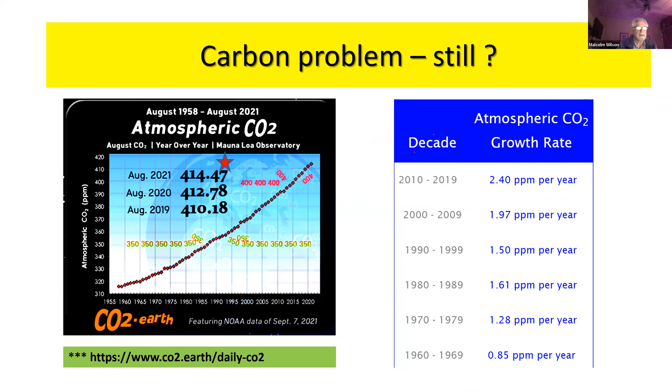So where are we? We've seen significant increases in the amount of carbon dioxide in the atmosphere. This shows us that not only is it increasing, but the rate of increase is speeding up as we move along.

And this is always a nice one to look at, the carbon dioxide concentration. If you could go back one.

So this is the daily, weekly, monthly average, etc., of CO2, and you can see the increases in those waves of carbon dioxide in the atmosphere as we move through the last couple of years. The peak is generally in May in Hawaii. A couple of points here: yesterday, the concentration was just over 420 parts per million. If we use the averaging curves, that was about 418 parts per million. This is CO2, not the other greenhouse gases.

NOAA has estimated that on a carbon dioxide equivalent basis, we're over 500 parts per million now.

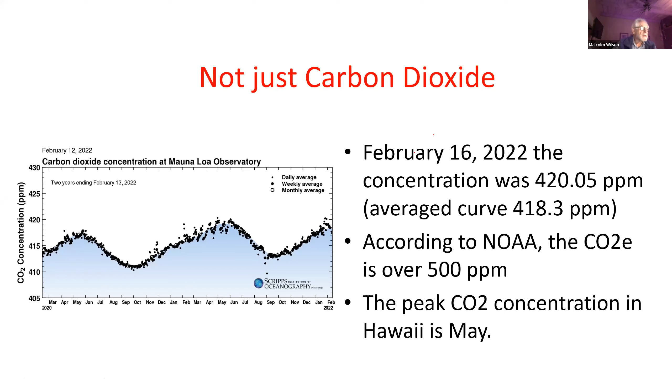So why do we need carbon capture? We, of course, have to protect the environment. As I said at the beginning, we're seeing changes to the environment, more extremes in terms of weather, some of the extreme events supercharged by the encroaching climate change. But we need to continue energy security. We cannot live anymore without it. We cannot manage the population of the globe without massive use of energy. So we have these two problem areas to deal with.

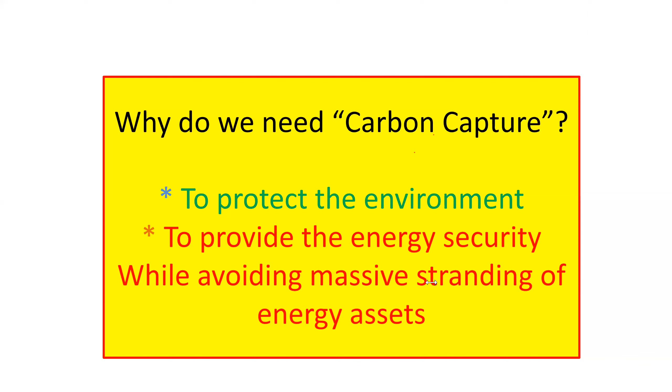Not only that, it's going to be very difficult to afford a rapid change to renewable energy, etc. Probably not even possible - hydrogen economy, electrical economy, whatever - without massive stranding of energy assets. So to some extent, we have to gradually phase those out over the coming decades.

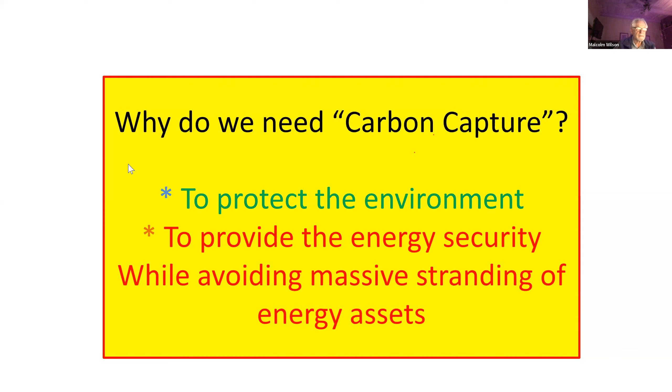So this is just a quick look at the embedded carbon emissions in various forms of electrical generation. Nothing is without CO2 emission - some of them, of course, are very low: hydroelectricity, wind onshore, wind offshore, etc. Down at the bottom of this chart, we see natural gas and coal without any scrubbing. And at the very bottom, we see what can happen with CCUS - with a 90% capture of the CO2 from those electrical sources, we can bring those down to something approaching renewable energy emissions of CO2.

So in terms of what this can do for us, we see how important CCUS, or CCS, is to the future of energy.

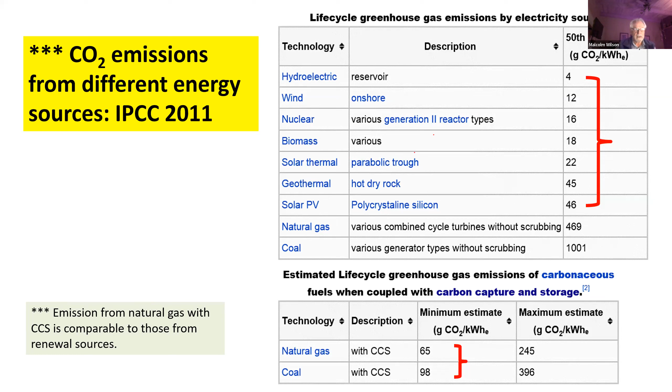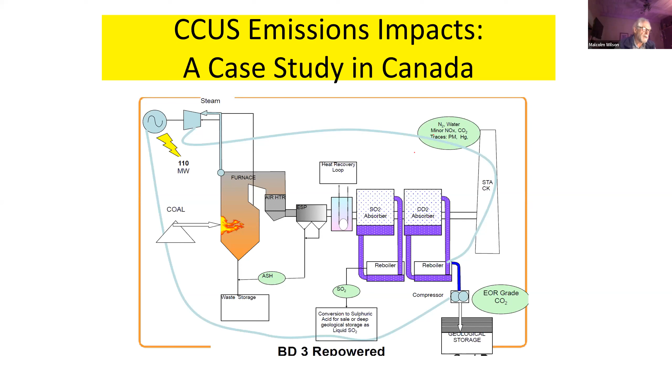And of course, we're proud to look at and see what's happened in Canada. Bill mentioned the Weyburn project, but along with that, we have the first of the coal-fired power stations that has done a conversion and is capturing CO2 with a goal of 90% CO2 capture, and utilizing that CO2 either in enhanced oil recovery or in storage in the Aquastore project in Saskatchewan. This will come back to - just one of the projects that's underway in Canada.

So the emissions impacts, as we look through, these are not just greenhouse gas impacts - there are other impacts as well, which are also important. Here we can see what happens when we put 90% capture on a coal-fired power plant. Of course, one of the negative impacts is the amount of parasitic load, reducing the net output of electricity to the grid, but this can be managed. It does have a number of benefits: the 90% reduction in CO2 emissions, effectively taking sulfur emissions down to zero.

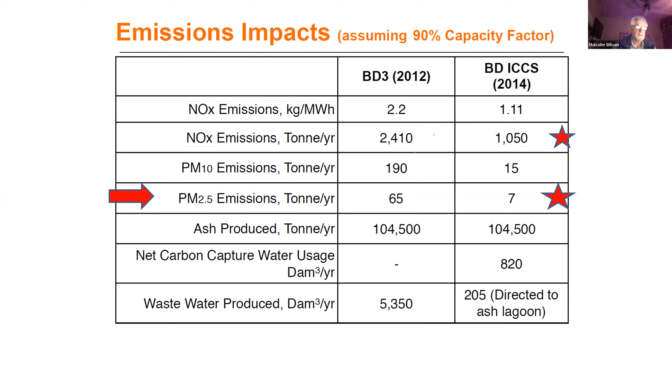And also significantly reducing NOx emissions and particulate emissions, both of which have health effects in the region. So we're also seeing a significant reduction in the amount of wastewater that's produced in this use of CO2 capture.

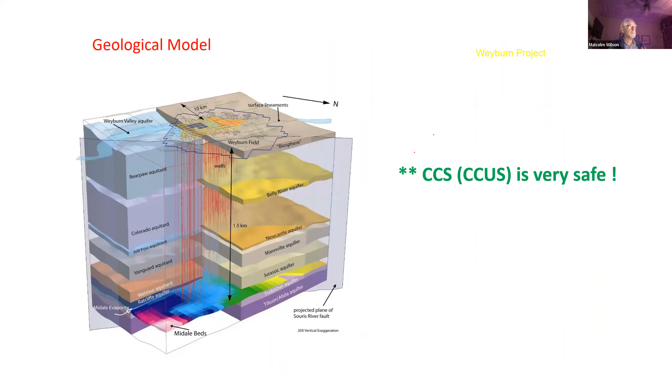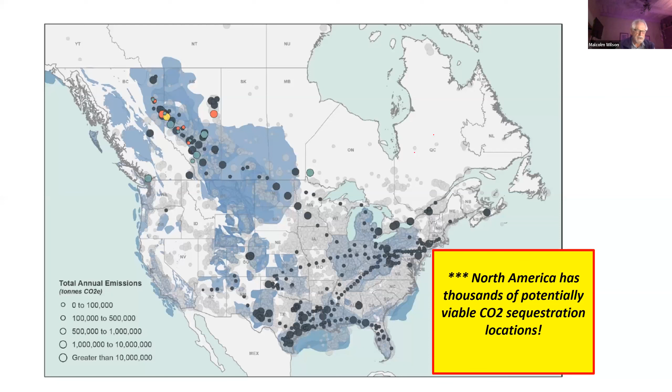We can see, looking here at the US and up into Canada, very significant areas where we have high quality locations in the subsurface for the safe storage of CO2.

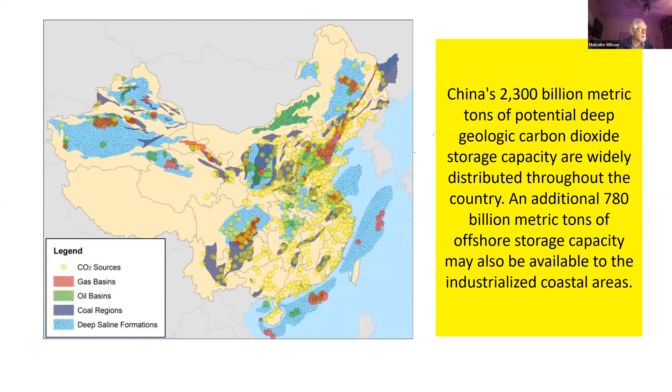We're not going to show everything, but you get a sense we're seeing similar distribution of saline aquifers where we can store CO2 in China as with the US, one of the biggest producers of CO2 in the world.

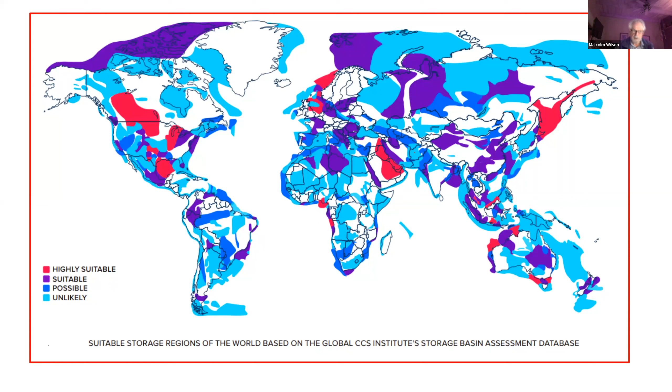Here's a global view of where those storage locations are and a sense of the quality of those storage locations. It's good to see we have a lot of potential in Canada and the US, but there's potential globally. Looking at the highly suitable areas, we anticipate that in a number of those possible locations we'll find equally good storage opportunities.

Energy security, of course, remains a critical issue, as I said.

One potential is storing CO2 through enhanced oil recovery, which offers the opportunity to learn a lot about putting CO2 into the subsurface, how safe it is, how it moves, and what the impacts are on the subsurface and the sediments and rocks. At the same time, we can recover considerable amounts of oil without having to look for or develop new fields in areas that may be more environmentally unfriendly.

One of those controversial areas globally is whether we drill on the North Slope, et cetera. So this offers us an opportunity to use what we've already got and produce more of the oil we're going to need for that transition, but in a way that reduces CO2 emissions.

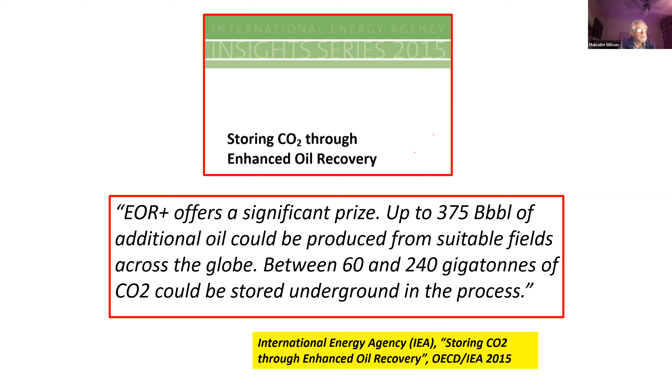As Bill mentioned, the IEA greenhouse gas Weyburn-Midale CO2 monitoring and storage project was one of those attempts, following on from Sleipner, to look at a major enhanced oil recovery project and understand what happens to the CO2, and the safety of the CO2 in that zone in the subsurface. All of the work we did, the risk assessments and so on, indicated that this is indeed a very safe way of storing CO2.

This is one of the papers we put out in the journal Petroleum that goes through the history of that project, how it came about, and something of what it's telling us.

This is a dated slide now, but just to give you an indication of the size, Weyburn itself has about 1.4 billion barrels of original oil in place. We're looking at an estimate of around 11 to 12 percent increase in the original oil in place produced back with the CO2.

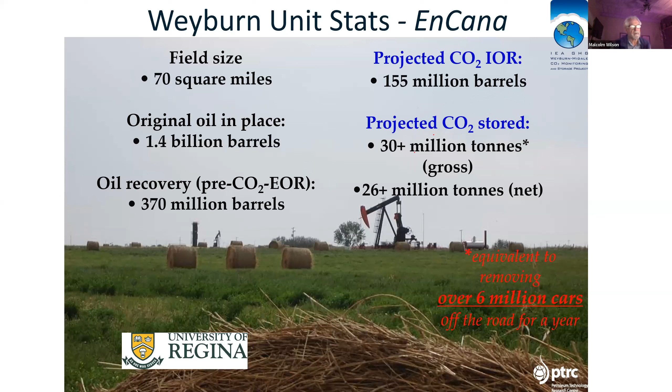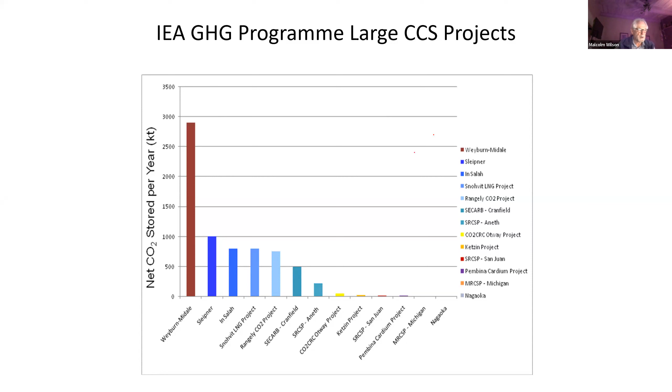This is again a little bit dated - there are a number of other projects out there now - but looking at the amount of CO2 stored on a net basis during the year: Weyburn is an EOR project, so CO2 is produced back, recaptured, and re-injected. Sleipner is a storage project with about 1 million tons a year of CO2 being injected and stored. In Salah is no longer in operation, but was a similar type of project for storage as opposed to enhanced oil recovery.

If we look at it on a life cycle basis, producing oil from somewhere like Weyburn with CO2, by the time that oil goes through a refinery and reaches your car, our estimates for Weyburn show that oil produces about 70% of the CO2 that would come from the tailpipe using oil from primary production. With oil sands, we have maybe 100% more.

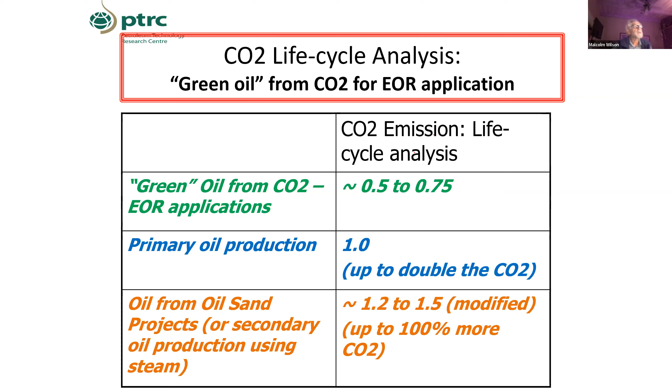So why Saskatchewan? Why Canada?

We have some extremely good areas for the storage of CO2, running right up through Alberta in the Western Canadian Sedimentary Basin and down into the US, particularly the east side of Montana, much of North Dakota, and a little into South Dakota. There's also a bit of an opportunity in the southwest corner of Manitoba, in the oil producing area of that province.

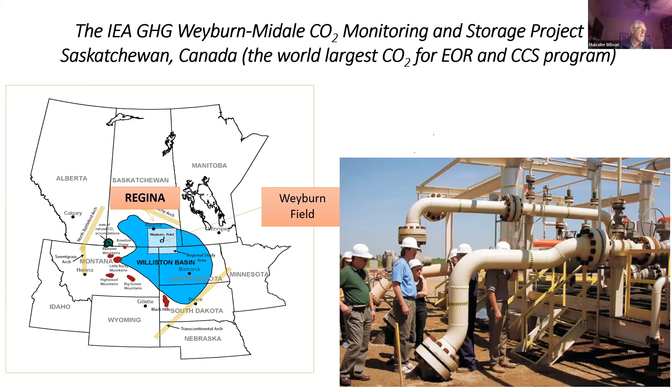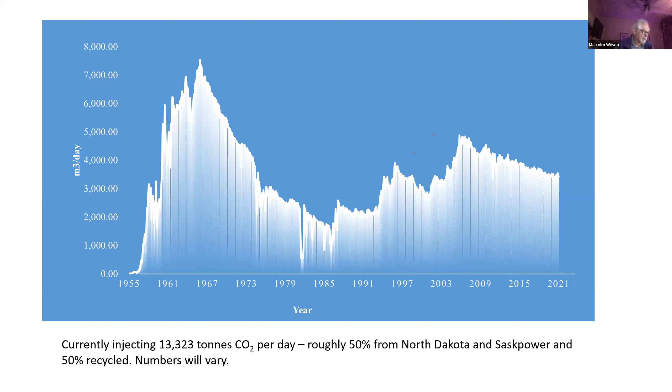This goes back quite a long way. We don't have the history of West Texas with the SACROC field, but Shell looked at CO2 injection in the late 1980s. As part of that, aside from drilling in the field and initiating a pilot study of oil recovery in the Midale field, we also looked at sources of CO2 that could be available. Not much point having an enhanced oil recovery project if you don't have the materials to inject, in this case compressed CO2 operating in the field at supercritical conditions.

We started with Paitoon when he joined the university in 1991. We started to work closely with the university and began building capacity for research into CO2 capture in particular, and ultimately into CO2 enhanced oil recovery as time went on.

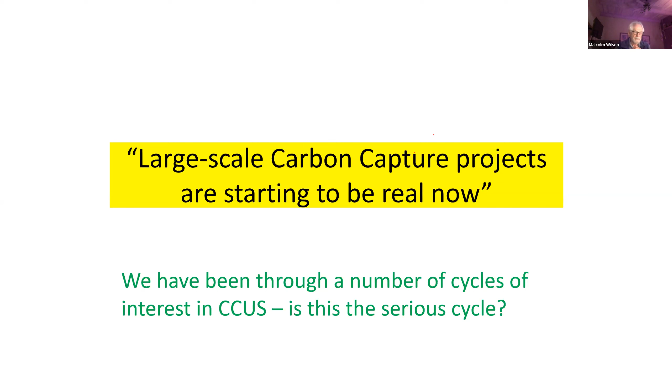So where are we? Large-scale carbon capture projects are starting to be real now. Paitoon and I have been through numerous cycles where we get excited because things are moving towards carbon capture and storage, and then it all fades away. It's our hope that this is a serious cycle, and we're going to see this continue and expand, getting far more use of CCS into the future. PT, I believe you take over from here.

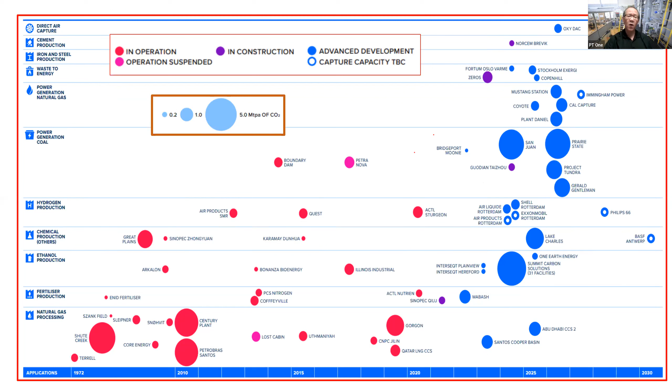This is the summary given out by the Global CCS Institute. As you can see, the red one is the one that's built, and the bottom one is kind of not the right number in my picture, because they have to capture CO2 anyway from petrochemical and natural gas. But from the hydrogen up, you can see not that many, but we have a lot of planning, which is in blue, over the next 10 to 15 years, which we think is going to be a real cycle of CCUS, because if we're serious as a society as a whole on the climate change issue.

Some of you might ask, well, if CCS is so important, how come nobody has done much over the past 20 years? The reason, in my opinion, is the cost. At this point, when you release CO2, it doesn't cost you anything, okay? And to capture CO2 and put it underground costs 60, 70, 80, or even $100 per ton, like you can see the numbers from Boundary Dam and Petra Nova. Nobody's going to do it if you don't see a benefit.

But the system is changing, especially in Canada. We have carbon tax, we have the 45Q program in the US, and you can see the number going up to like $80 per ton US. And by 2030, we will have $170 per ton carbon tax, which will hurt if you don't do anything with the CO2 that you discharge. That is the situation. That's why we do believe that if the tax structure stays as planned, the government of Canada and US plan, there's going to be a lot of activity in CCUS.

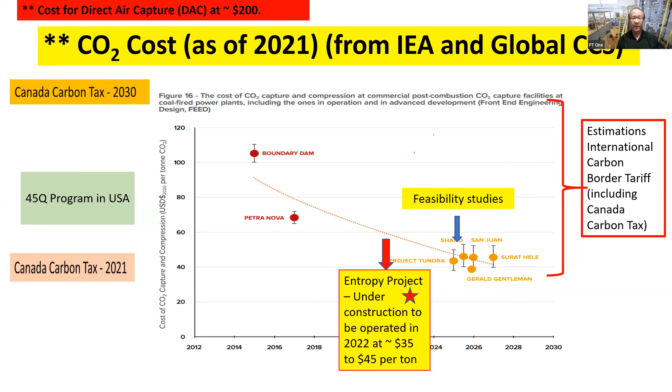We can do a lot more R&D, and we have done more over the past 15 years. When CCS activity went down, we went back to the lab, we did university research to improve the efficiency, and I will show you some of that data.

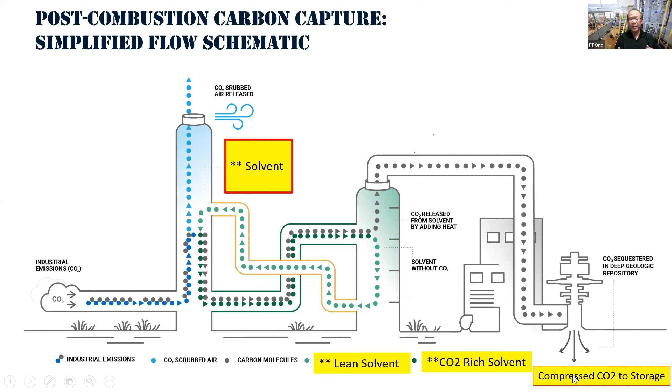First, let's see how the post-combustion capture process looks for somebody relatively new to this. The process is quite simple. You have a packed column, you have solvent, which is the key element of the process. It's kind of like blood in the human body - if we don't have blood, we can't survive. The same thing: if we don't have a good solvent in the CO2 capture process, the system will not work. We capture the CO2 from the absorber, we strip off the CO2 in the desorption section, and we compress the pure CO2 and put it underground. It's as simple as the diagram, but in the real world, things are much more complicated.

We have to get the right packing. We have to have the right process integration, because we have cooling and heating at the same time. And we have to have a relatively knowledgeable operator. We can't just push one button and let the system run.

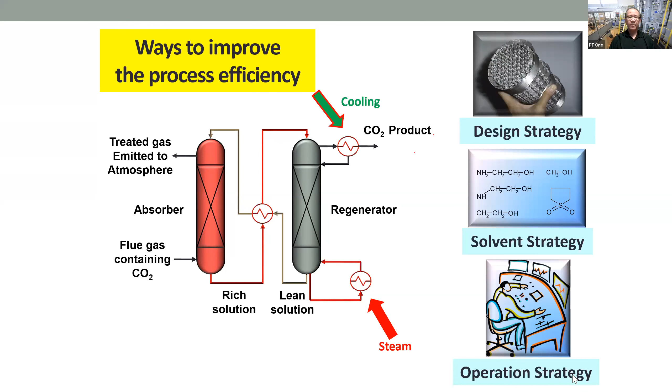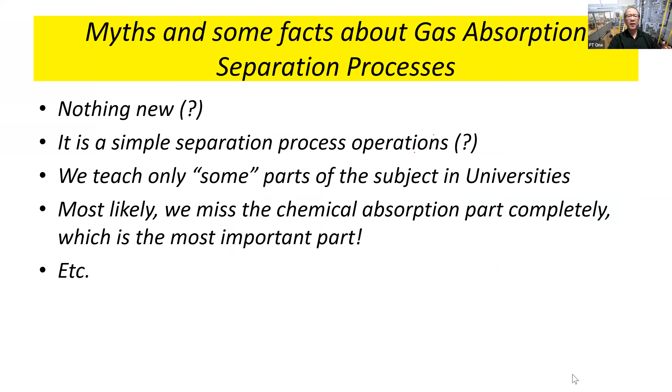In my experience, the diagram looks quite simple, so how come people don't do it? The magic part of it, I won't bore you with the technical detail, but some of you interested can join me tomorrow at 9:30.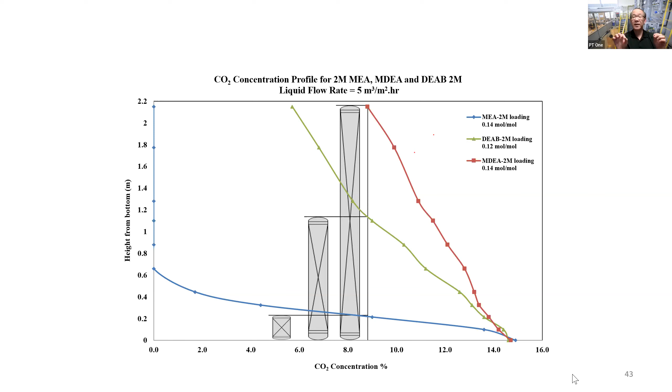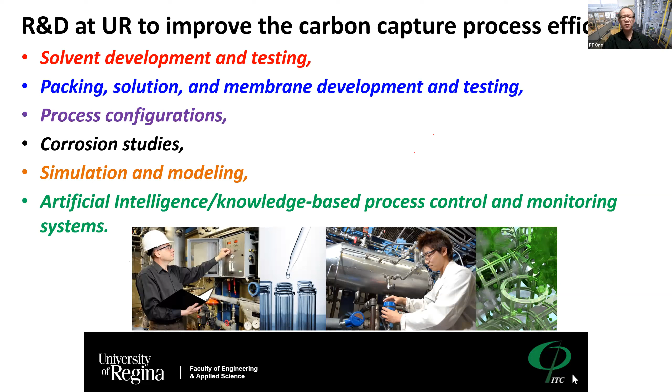We worked on a number of solvent packing, process configuration, post-build operation, and process control over the past 20 years. This is some of our results - I won't go into detail.

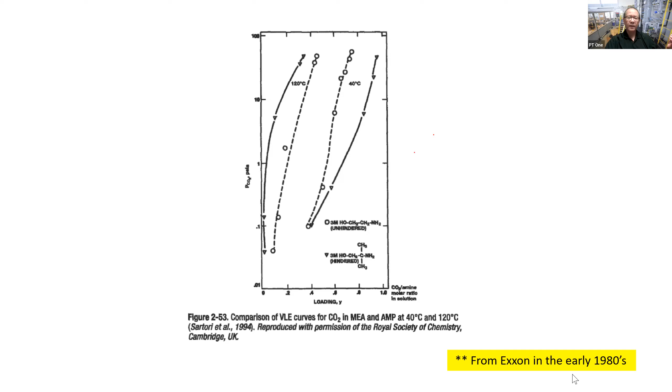We mimic the way people developed solvent in the 70s and 80s at Exxon Mobil, when coal conversion was really popular. We have some patents on the long chain amine, which has many arms that can capture CO2 more efficiently. I'll PDF this and give it to Dr. Bill Zeng if you want a record of where those patents are.

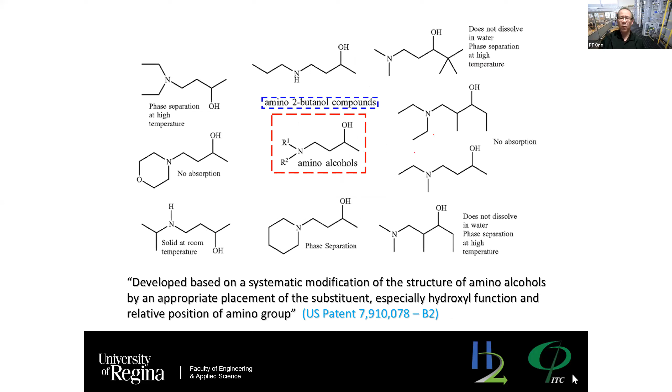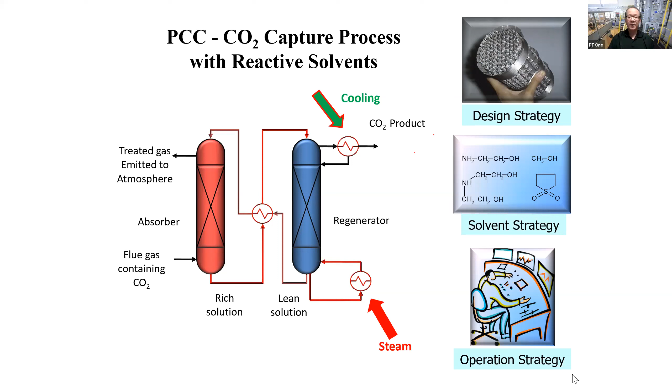We have some patents on the process configuration, and you can see the process of CO2 capture. You have cooling, which costs money, and heating at the bottom, which also costs money. But these two things work against each other - if you heat too much into the system, you need a lot more cooling on top. So process integration can be quite important.

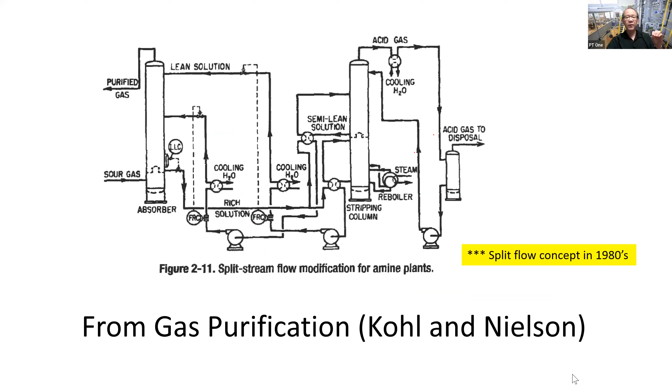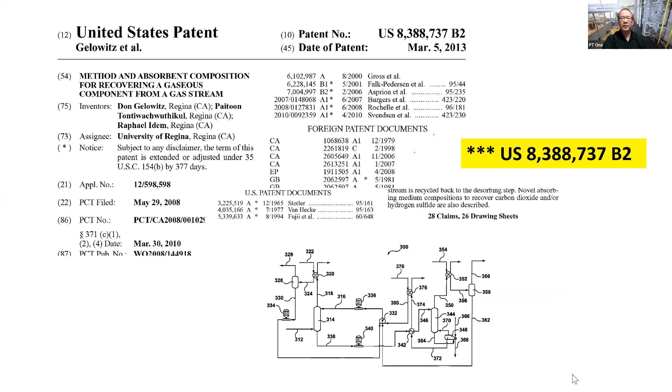We mimicked the process done in the past by Kohl and Nielson, and we modified it. We have another patent that came in 2013 on process integration.

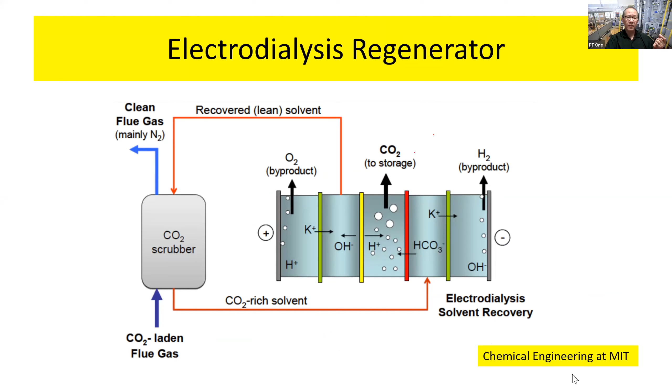Some people, not only us - some groups in Texas, and this one from MIT - want to use electrochemical processes to regenerate the CO2. They haven't tested it at big scale yet.

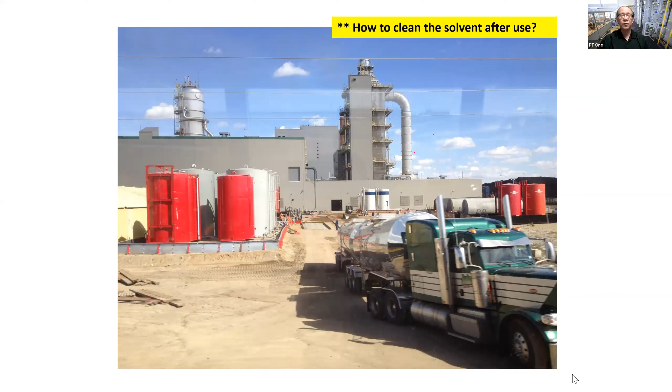We also have to work on how to clean the solvent. As you know, on day one the solvent looks really good, but by day 300, some solvents have a big problem, as you can see in many locations around the world in gas plants and CO2 capture facilities - the one in Texas in particular.

We have a new way to clean up the solvent, similar to the dialysis process of our kidney in the body. You have food coming in with cholesterol and sugar, but we have to clean it up - the kidney system reclaims a kind of kidney equivalent for the CO2 capture process.

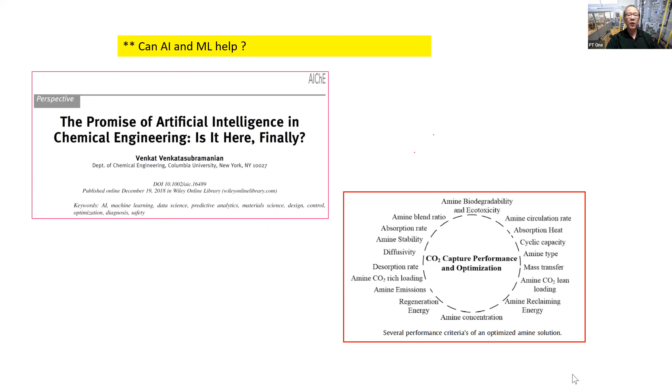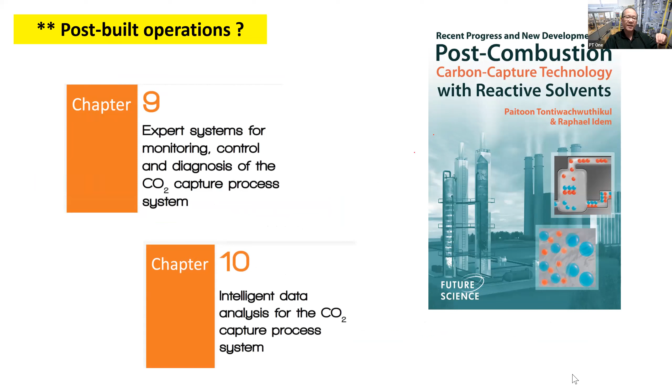We can use a more intelligent way, in my opinion, to do CO2 capture operation - I won't go into detail, but some of our books have a couple chapters outlining this. They call it post-built operation, a knowledge-based system for monitoring and control for CO2 capture. If some of you want more detail, join me tomorrow at 9:30 for the technical term for chemical engineering people.

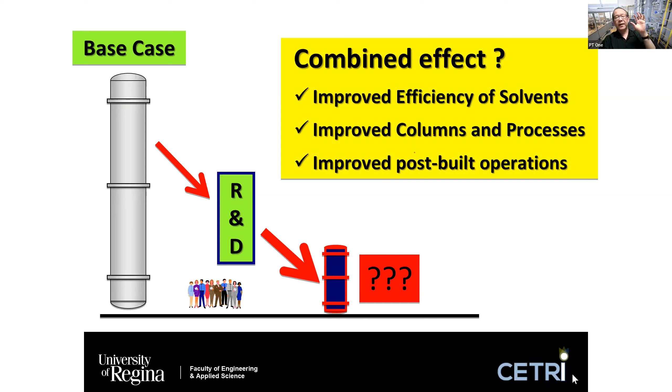The question is, we have so many elements we've worked on in the past and they work well individually - can they work well together? That's the big question. In our opinion at the research team at the University of Regina, we think yes, we can. If we put all those together - improvement of solvent, the column, and the post-built operation - we can shrink the column size and the cost substantially.

This is how it should work. The key element of CO2 capture is energy. If we go out and buy, or build ourselves - a simple fourth-year chemical engineering student can build one - but we're going to pay a big price in terms of energy cost.

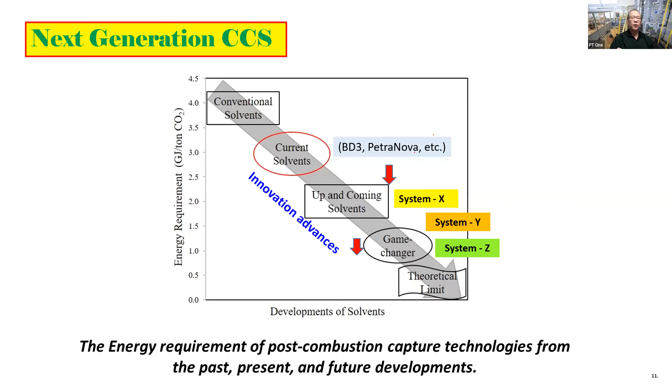Well, if we can do this, what will happen in terms of cost then? This is interesting in my opinion. This is the data from last year from IEA. If we put all the key elements in the game in terms of cost on the left-hand side.

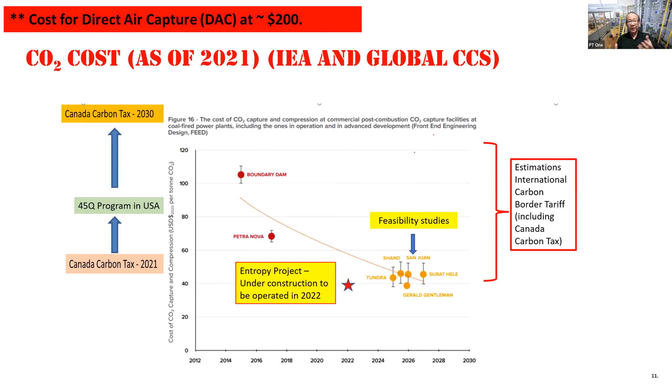The cost of discharging CO2, which is carbon tax basically, and the cost of CO2 capture and storage - 45Q is a good example. If we can get $80 US per ton from the 45Q program in the US, and we capture and store CO2 for $40 per ton, which we want to do, and a number of our industrial partners want to do, and we build one - we're going to show you the picture in a minute. Well, if you can get $80 and invest $40, of course we will do it, right? Because you're going to make $40 benefit. Okay, that is the key.

One company even goes further, declaring that they want to be a carbon neutral gas producer, which is relatively easier compared with oil sands, by 2025, which is very ambitious in my opinion, and they were doing it. And you can say, well, how are we going to find investment? Well, because it's not going to be cheap.

This is one of our industrial partners working in Alberta. They built the first fully integrated natural gas facility, and they want to clean up all the CO2, put it underground to have zero emission. This is in the northwestern part of Alberta, and they're going to start running that unit in the summer this year, in 6 months from now.

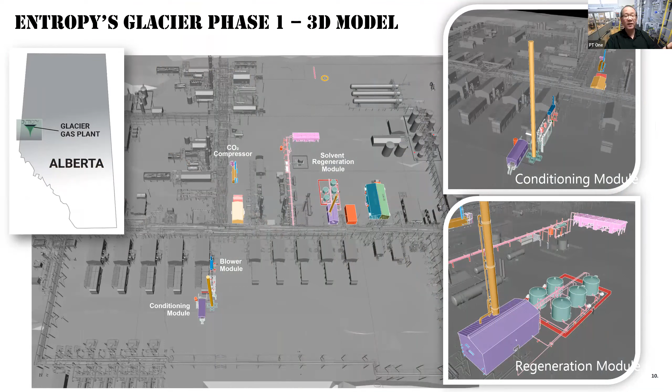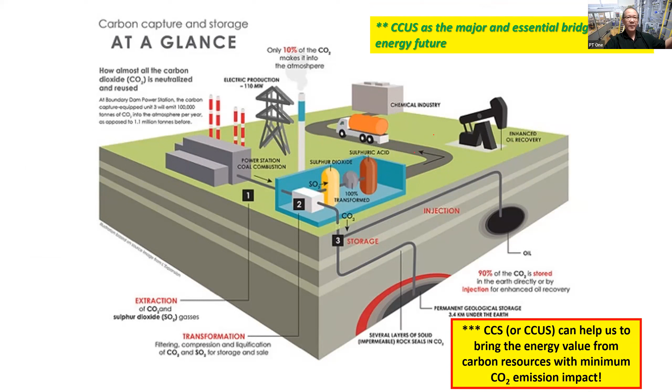Okay, a few key points before I end and open for discussion. The philosophical question is going to be, well, do we stop using fossil fuel completely and put it underground, don't touch it? Is it feasible? In my opinion, and in many people's opinion, including IEA, they already have the statement at the beginning of our presentation - it's practically impossible.

And this is the energy profile from Economist Journal. Okay, coal is going to be with us for quite some time. If we don't use it, China is going to use it because they have to use it, and India and many parts of the world. The best way is to help them clean up the environment while they're able to use the energy.

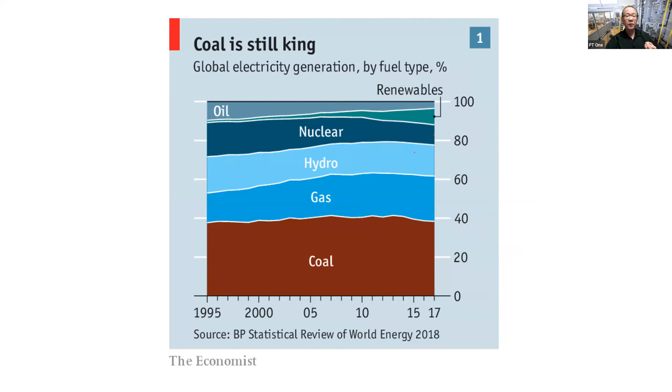And I can't envision that we can fly the plane like this with renewable energy 100%. Is it engineeringly impossible? And one more item that I want to leave with you as young students - many of you, I saw that 129 people are joining us today.

Sometimes just to do carbon capture and storage alone, we clean up 90%. But we even have potential if we mix biomass with carbon based fuels. For example, biomethane with natural gas, biomass with coal, and have the tail end of carbon capture and storage to put all the CO2 underground. At that point, we will have negative carbon emissions.

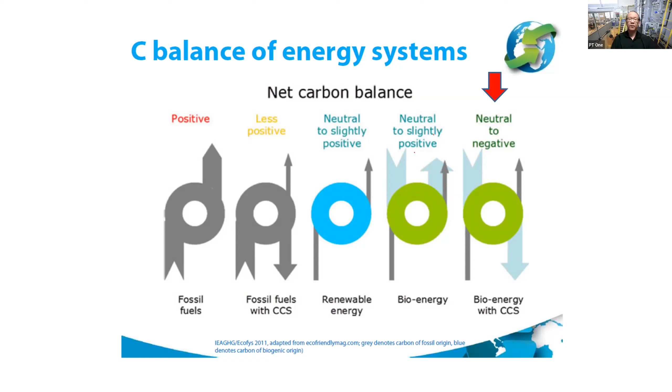To think of it, the more you use energy, the more you take the CO2 and carbon out from the atmosphere, which is kind of almost counterintuitive, but it's real. We can do the calculation on those.

Okay, this is my last slide to share with you: CCS or CCUS has to be a key transition into net zero. Otherwise, it's impossible.

The transition is not going to be easy, it's going to be long and hard. And people say, oh, we just switch off everything and use sun and wind. It's impossible, especially in a climate like Canada's.

Society as a whole has to be practical, not too ideological, because as Dr. Malcolm Wilson mentioned, we've seen the cycle go up and down probably 3-4 times over the past 30 years. The left doesn't want to use gas and oil anymore, and the right doesn't want to do anything because it costs money, and in the end nothing happens.

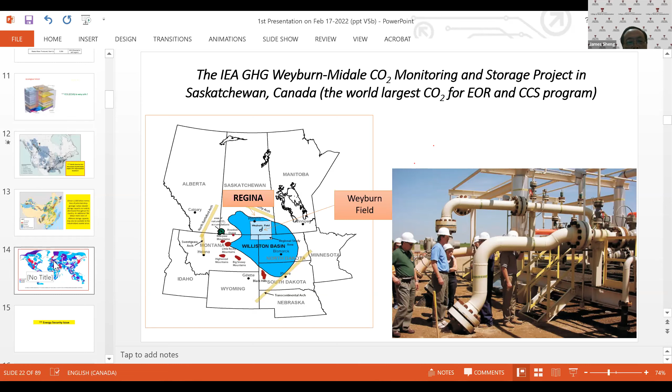Okay, very informative presentation. First, I have a question for Dr. Wilson. In one slide you presented where in the world CO2 sequestration could be suitable, which areas could be suitable. My question is, what are the key criteria to determine whether an area or geological formation can be used to capture or sequester CO2? Because my concern is that even if the cap rock is very tight, over a very long time eventually the CO2 might get out of the formation. So what is my question - what are the criteria? How do you know if a place is suitable for sequestering CO2?

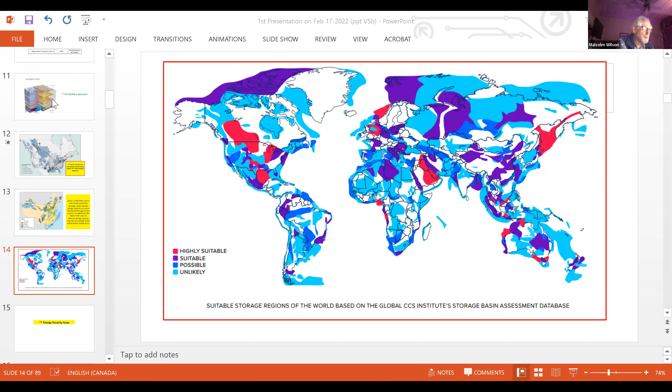You're of course absolutely right. Ideally we're looking at a depth of greater than 1 kilometer - that's not 100% required, but ideally. We also ideally have these aquitards or aquicludes above. I always use the analogy of putting an onion in a Ziploc bag, then another Ziploc bag, then another Ziploc bag. It doesn't necessarily prevent everything from getting out, but it does a much better job than a single bag, or just putting the onion in the refrigerator along with the rest of your food. So you want that kind of environment.

I think one discussion we didn't get into due to time limitations is that putting CO2 in the ground, unlike human structures where things deteriorate over time - so the older a building gets, the more likely you are to run into problems - the longer the CO2 is in the ground, the more nature takes over. When you inject the CO2, it's more buoyant, lighter than the fluids into which you inject it, and it tries to come up to the surface. Over time, that CO2 will dissolve in the water - obviously in oil it dissolves in the oil, but if we're putting it into an aquifer, the CO2 will dissolve in the water and actually increase the density of the water. So gravity ends up working for us, not against us.

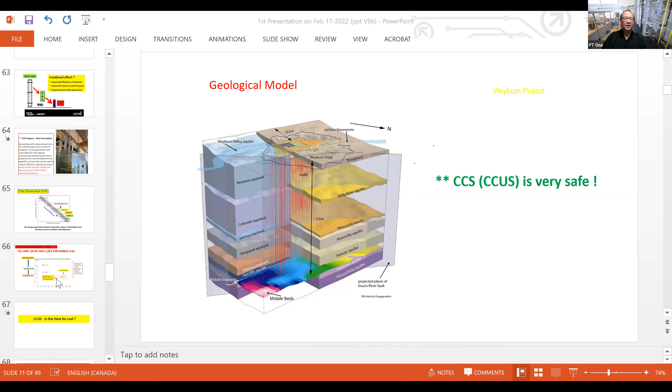Let me do this. In my opinion, it doesn't matter as long as you can capture CO2 cheap enough—it can be any technology. Sometimes people can do paper studies here and there, but when they have to build and run and generate CO2 or income from the CO2 capture, that is the ultimate test, in my opinion. It can be any technology, as long as at this point—and I do believe the number should be around $50 per ton or lower, the lower the better.

Especially for countries with no carbon tax—in my opinion, wait another 5-10 years, there's going to be a worldwide carbon tax. They're already at the UN starting to talk about a carbon border tariff. Basically, if you produce your goods in a country with no carbon tax, when you move to a different country to export, you have to pay the carbon tax there, unless you consume everything yourself. That is the situation. My answer is: if you can capture CO2 at a reasonable price—at this point, $50 US per ton or lower—we can use any technology.

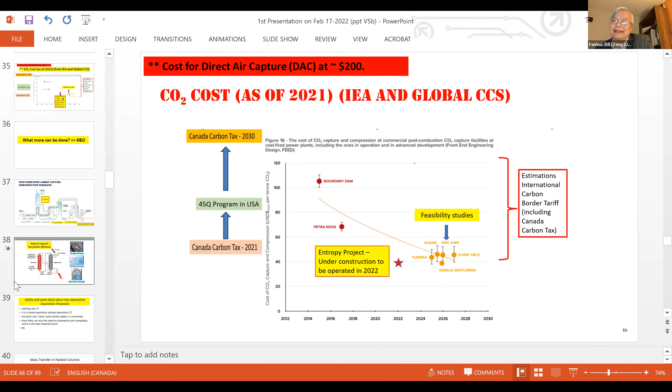In one of our talks in the next few weeks, we have a presenter from Yanchang Petroleum. Their current project is CO2 capture from chemical plants, and the cost for that capture - the presenter is going to share that it's about 120 yuan per ton, which is about $20.

There are lots of factors that affect this - technology, your input, and your output. Whether you're at 99%, 95%, or down to 90% capture rate, the cost could change. From the engineering perspective, we can always find an optimized approach for this.